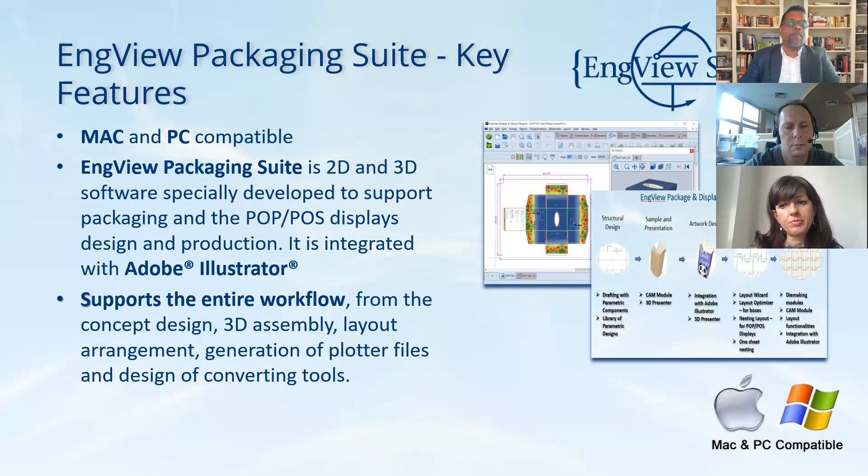From the structural design, as I said, we have the two libraries, we have the 3D visualization of the packaging, we can export the 3D, we have a very powerful integration with Adobe Illustrator that graphic designers can use to apply the graphics over the 2D and see instantly the visualization on the 3D.

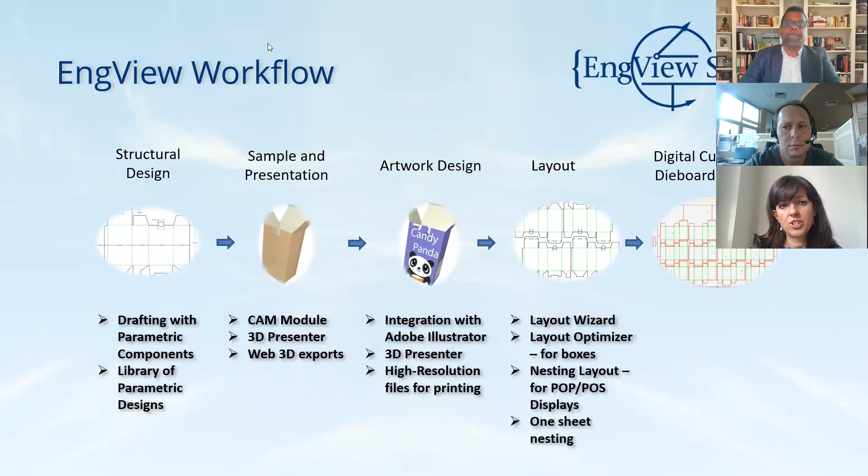We have all the capabilities for designing the files for production and preparing the files for production. We can prepare the die board design, we can generate an optimized path for the cutting, and again with the integration with Adobe Illustrator, we can prepare the printing files with high resolution images.

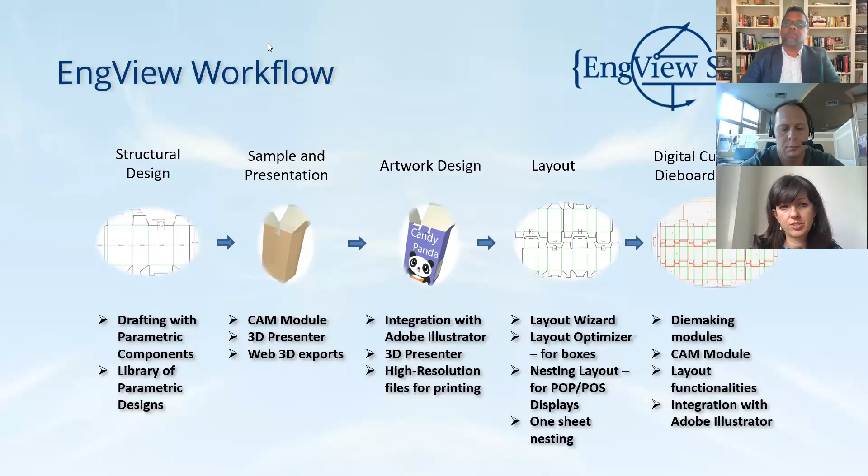Our software is structured in bundles and modules. The idea is that all companies have different production capabilities, and our software is modular based, so customers don't pay for the whole package, but they pay just for the modules that they're going to use. After the presentation, if you have some questions, you can direct them to Udaya.

You can ask them for your specific business needs, what would be the best configuration of our software. We have predefined bundles that are available for graphic designers, like our art bundle. We have predefined bundles for package designers, for display designers, for die makers, but we can also make very custom configurations just for your business needs.

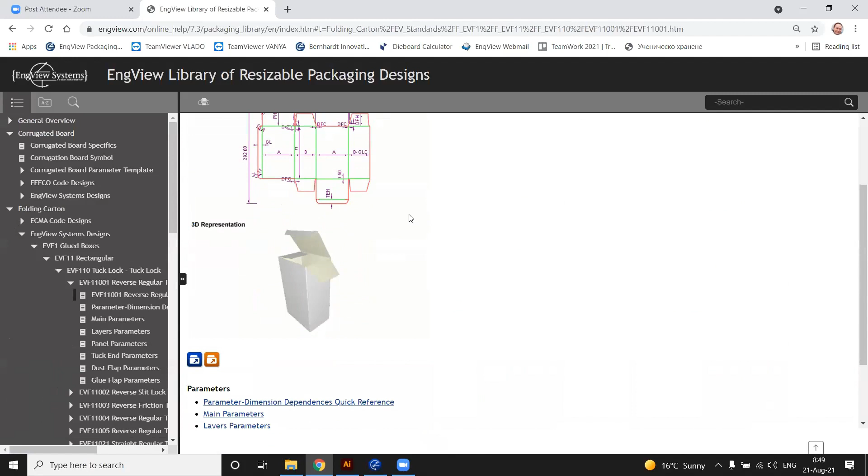Okay, Nick. As I mentioned, we have our own libraries. These are the designs which we made over the years thanks to our engineers and structural designers. We have divided them into different groups, and let's open one of the design pages. It's simplified for better navigation. There is a 2D, there is a 3D representation of the box, and there are two buttons which represent the direct way to Engview and to Adobe Illustrator.

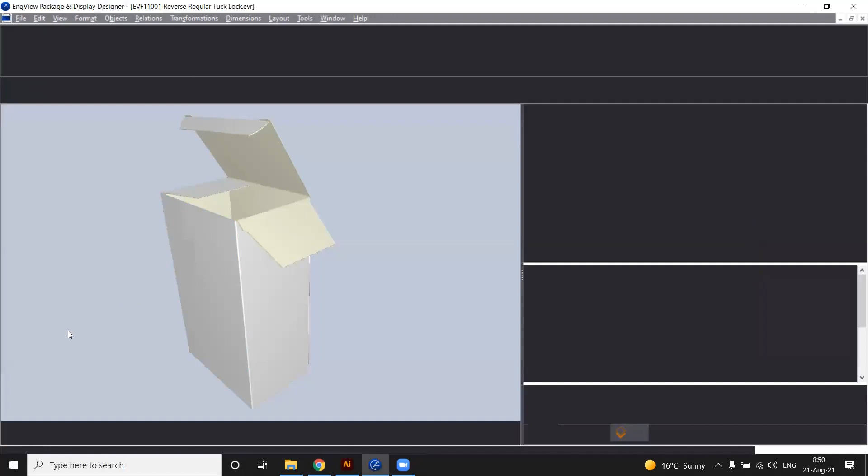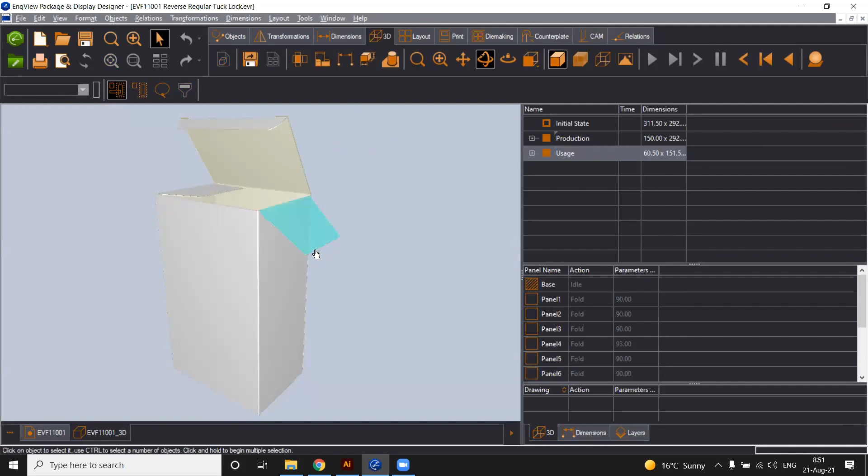It means, also at the beginning we have shown the integration starting from our library. So let's go to Engview. At the very beginning, I want to say something very important. In comparing to other software, our Engview has very unique functionalities. In one and the same file, we have the 3D, the 2D, and all of the elements and components and the drawings you will create. Furthermore, they will go in the same file. So there is no process of open, save, open, save. Everything will be in one and the same file. As you can see later, it will be for the layout, for the die board, for the CAM tool path. Everything will be in one and the same file.

Udaya, do you need time?

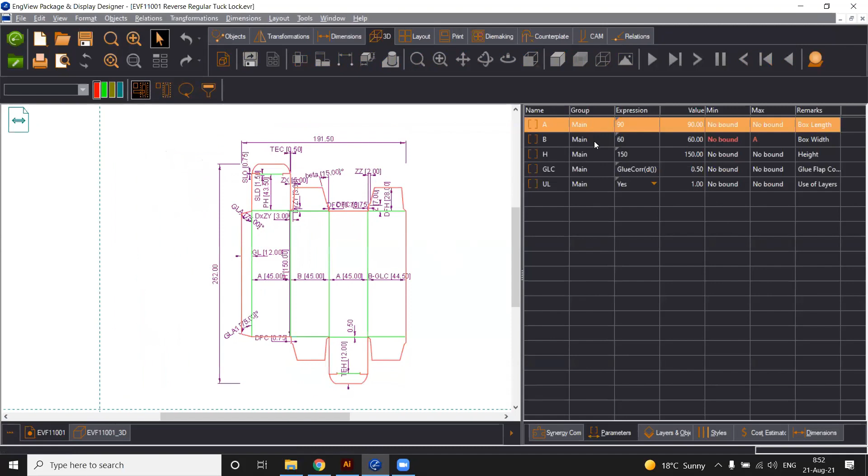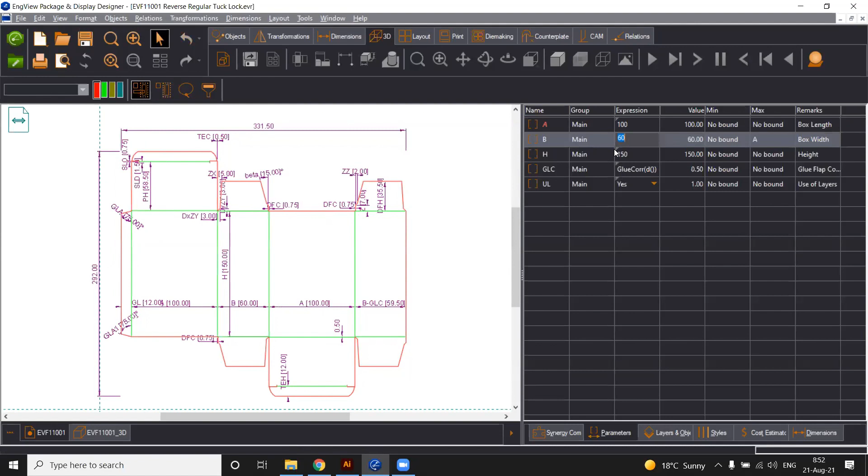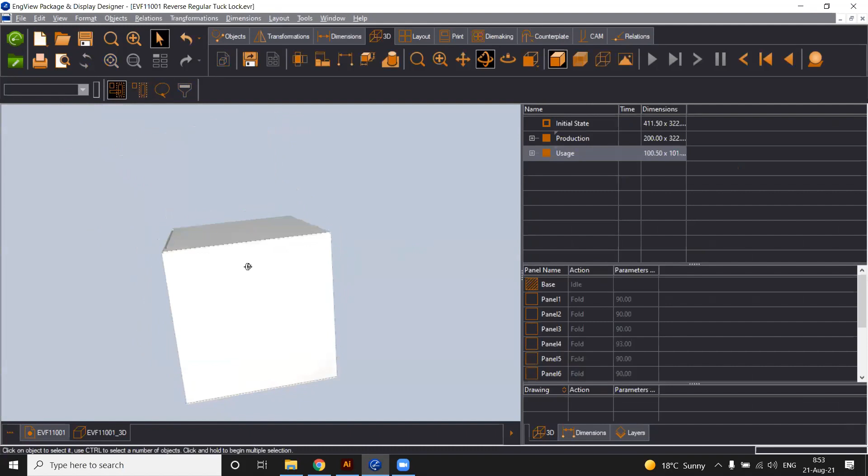Okay, as Lina mentioned already, but I have to note this. All of our more than 2,000 designs in the library are parametric. What does parametric mean? The structure is alive. It means regarding every job, we can resize, we can modify not only the sizes as width and length, but we can also make changes on the bottom, on the top, and other panels. So let's say we have a job to make a cubic box for our customer. It's very simple to put the sizes here, and the software automatically calculates the new parameters. So we have a ready box for further steps of production. Let's go to the 3D, refresh, and now we have the 3D animation for this box.

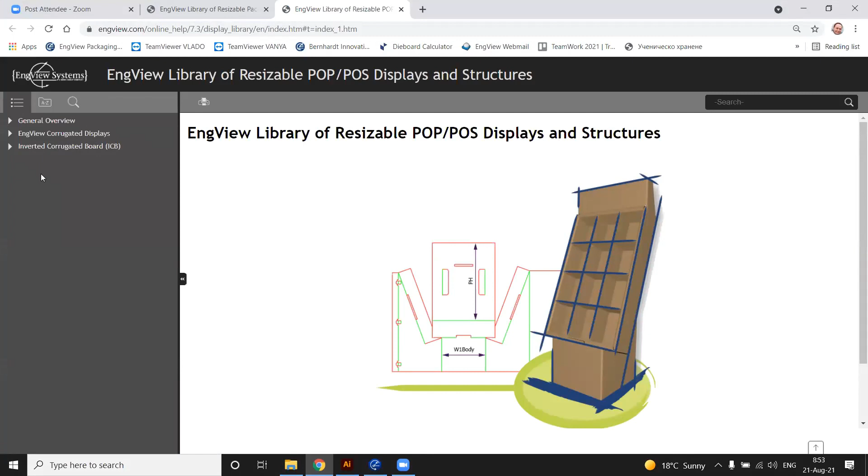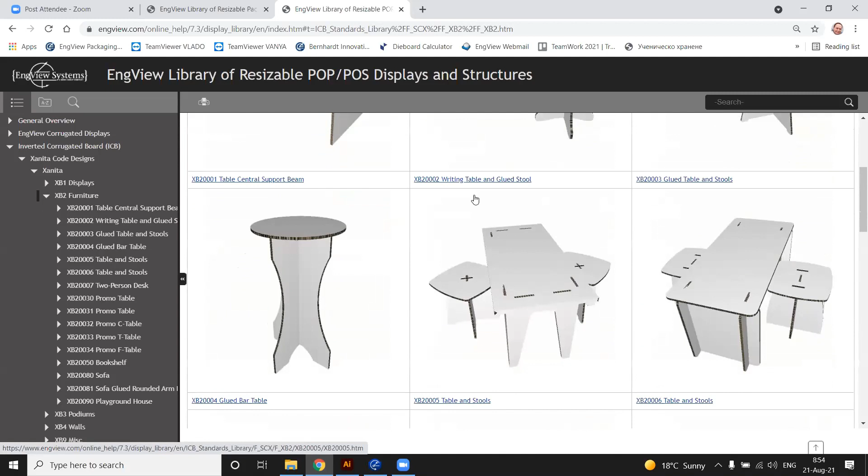Some words about the other library which we have. This is the display library. We have more than 5,000 different kinds of structures here. They are divided into groups: corrugated displays and a group of structures made with inverted corrugated board, maybe you know it as honeycomb or reboard. Actually, this is one of my favorites. We call it the library of Xanita. Xanita is the name of the material of one of our partners. So you can find very interesting ideas here for short time events, like exhibitions or promotions. You can choose any of these structures, resize it, and be ready for production.

Now we are going back to the displays, divided into two main groups: counter and floor displays. The same navigation lets us choose by the structure of the display: shelf, step, etc. So we're going to choose one of these structures and make some changes there.

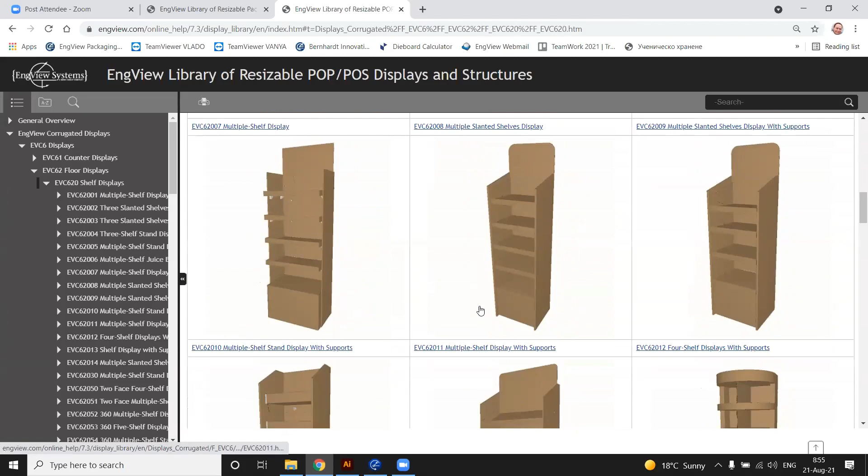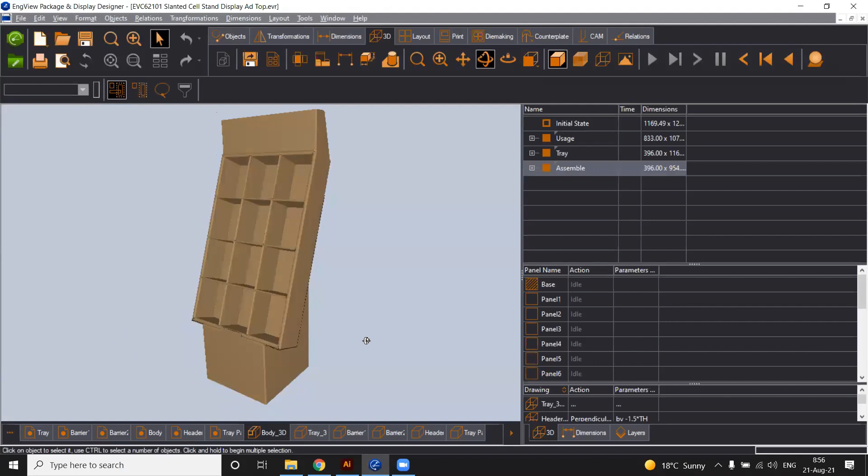As you already know how the design page looks, there is a 2D representation of the parts and a 3D representation, and very fast we're going to make some changes. As you know, modern displays are made with different kinds of materials. We can make it also the same, because of production needs and the machines, but we can apply different kinds of materials, not only for the 3D preview, but also for real production needs.

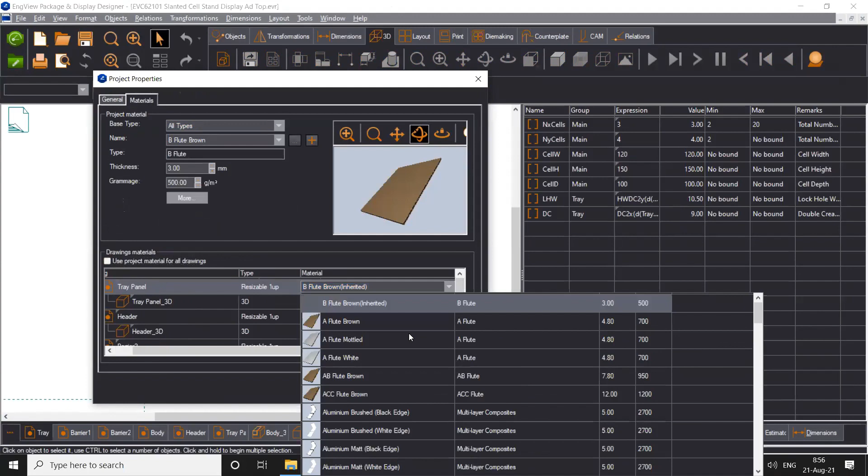So we choose, in order to make a preview, one of the other materials, which is white. So we already have this change here.

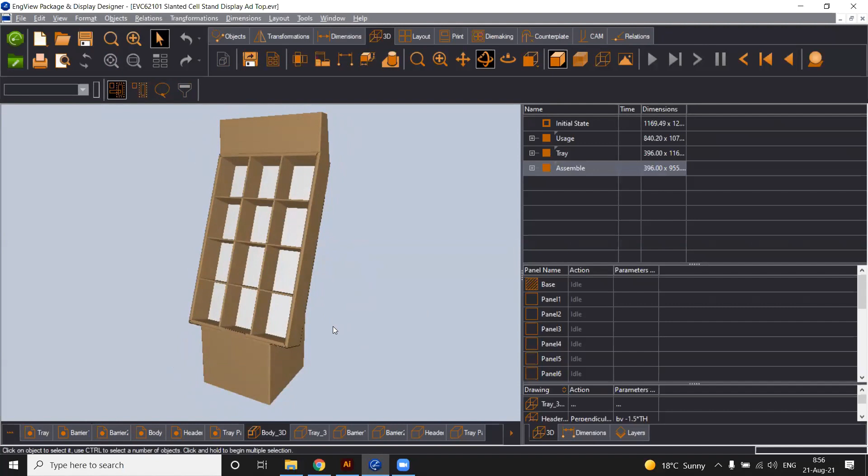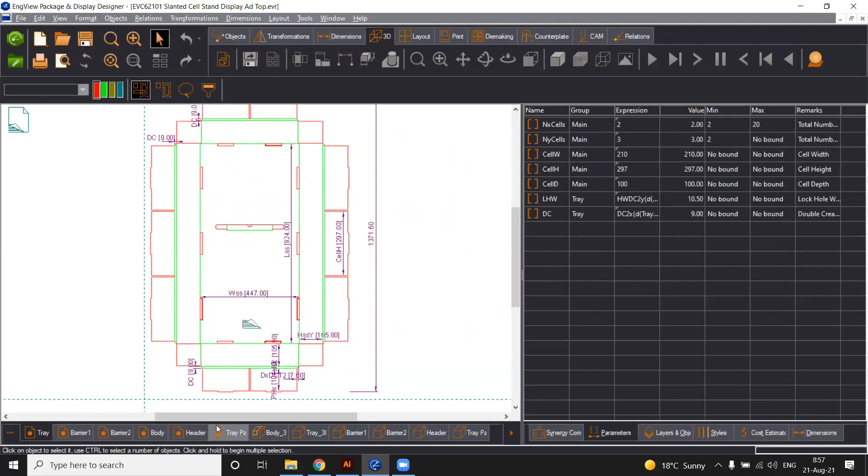But let's say we have to create a brand new display very fast. Let's say the job is to make 2x3 cells, and we have to prepare this for A4 format. So with only a few steps, making the change, everything is changed directly. We go to the main structure and refresh it. So we have a brand new display in only a matter of seconds, and we are ready for further steps of production.

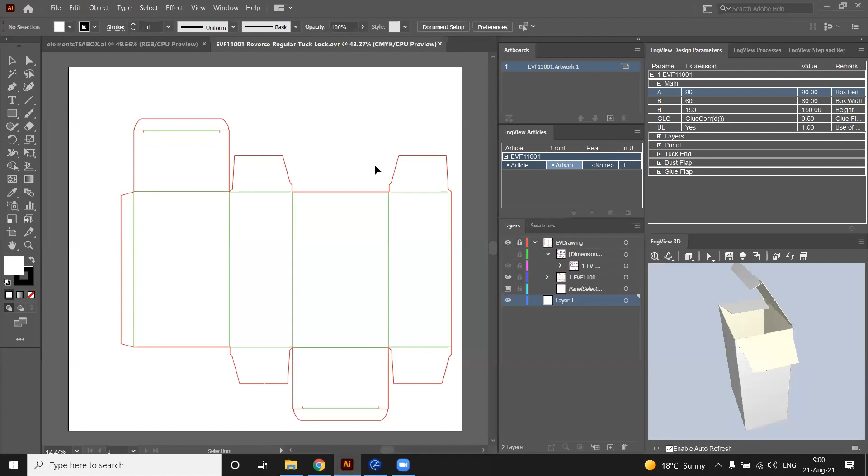As you can see here, we have also the possibility to change the sizes, to resize the box. But as I said, if you need to make structural changes, better start from Engview. If you need to make graphics and finishing effects, you can start with Adobe Illustrator, but don't be afraid, you can always switch very simply to Engview.

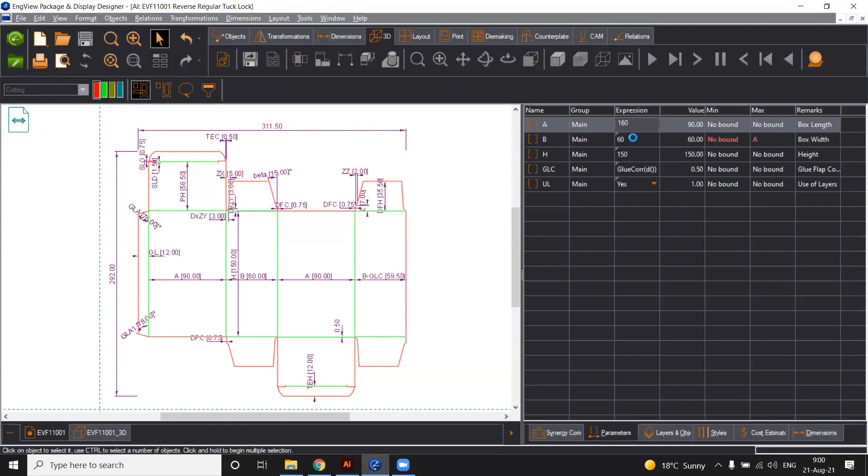So it's the same box, and we're going to make some very fast changes. I have prepared a special tea box for you, and the sizes are this one. As you can see, immediately it's changed. Here we can refresh, and here we are. We have a brand new box as a structure, and we can continue making the Adobe design.

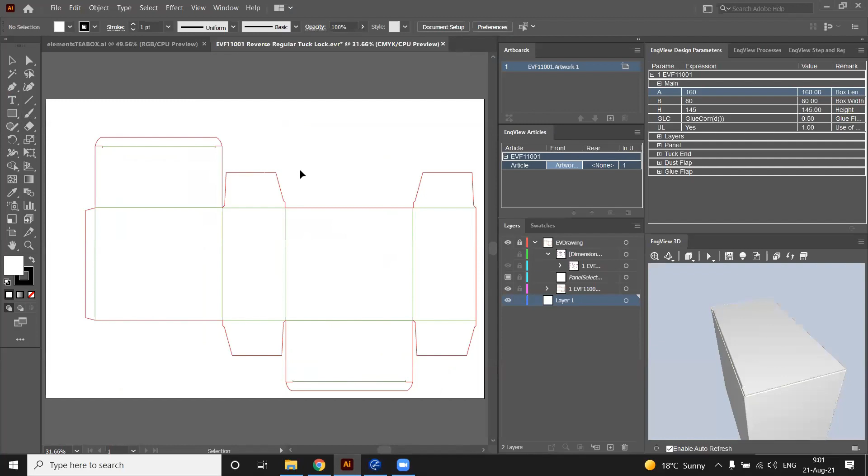One of the first steps made by designers is to make the graphics for the background. I have prepared a tea box. First of all, I want to apologize, I'm not an Adobe Illustrator professional, but I'll try to do my best. So now we have the graphics, and as you see, immediately we can see the graphics in the 3D.

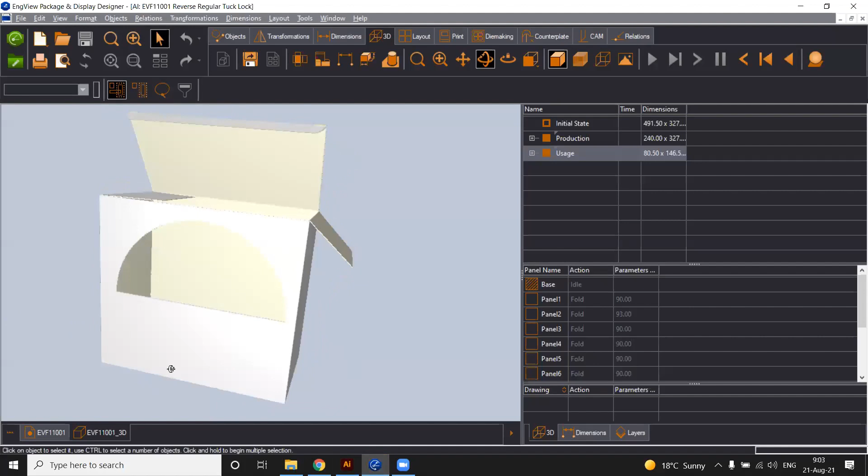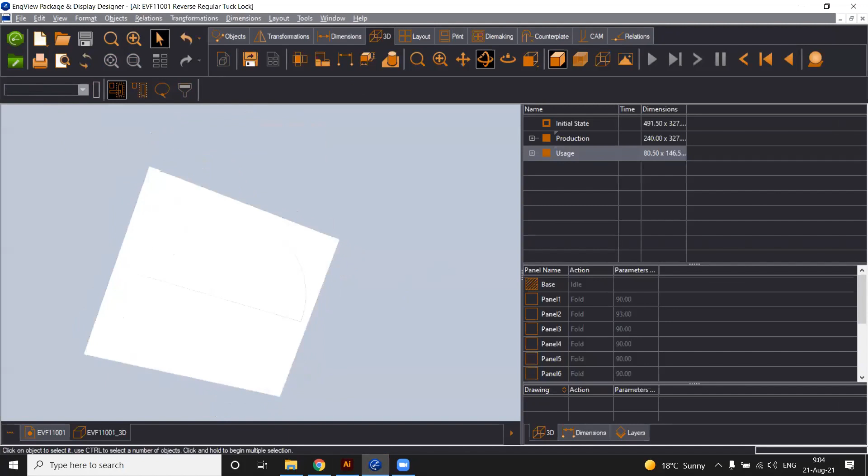As you can see here, we have already the cutting, but I wanted something more. I wanted to make this an opening panel. I choose the bottom line and I make it crease. As you can see, immediately there is a change in the color of the line, which represents the creasing. I go to the 3D, I refresh, and here we are. We have already a panel which could be open.

I have it fold in order to make it for the preview. I choose the panel, I go here, I fold it by, let's say, 45 degrees, and here we are. We have an opening.

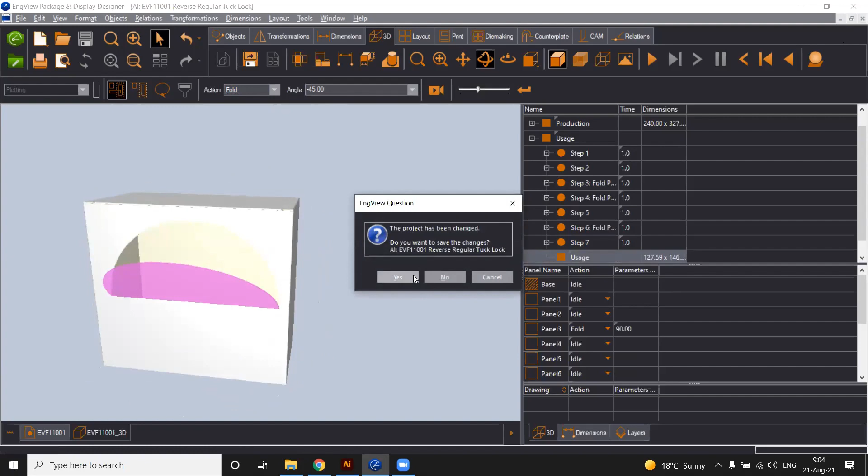Okay, let's continue. The next step is usually to make some finishing effects, to add a name, to add images which will be applied as finishing effects: foil, embossed, etc. So, as you know, for this kind of finishing effect, we should put a layer.

Finishing effect, we should put a layer. Let's call it this layer foil. Udaya, do you need time for explain it?

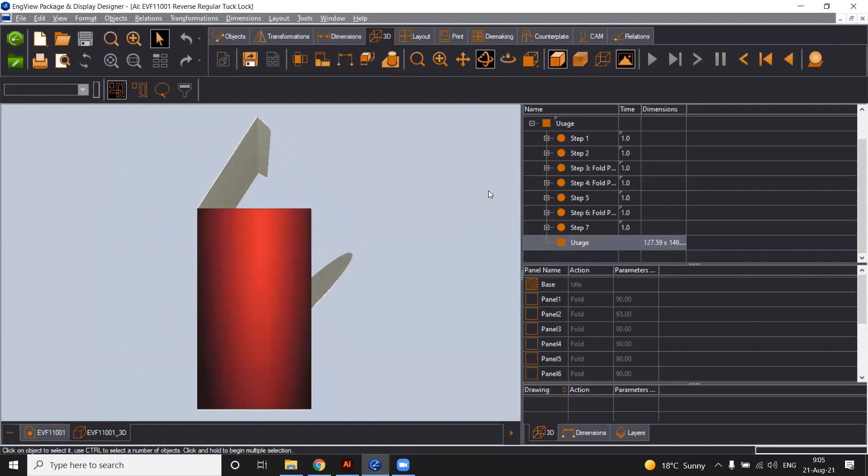Okay, so we have prepared a special layer for foil. I'm going to my file, choosing the name, copy, and then we put it in our design. As I said, I'm not a specialist in this. I put it here. As you can see, immediately there is an image already applied in 3D, but I wanted to make it with hot stamping.

So I'm creating the finishing effect, and I'm gonna choose the foil layer. I choose the partial hot stamping, and immediately there is hot stamping gold for this text. Okay, I wanted some more. I wanted for the same layer another image. I choose this one.

I'm going back to the design, and I want to put it there. As you can see, immediately the finishing effect is applied. It's not okay, but that's because my video card isn't working properly today.

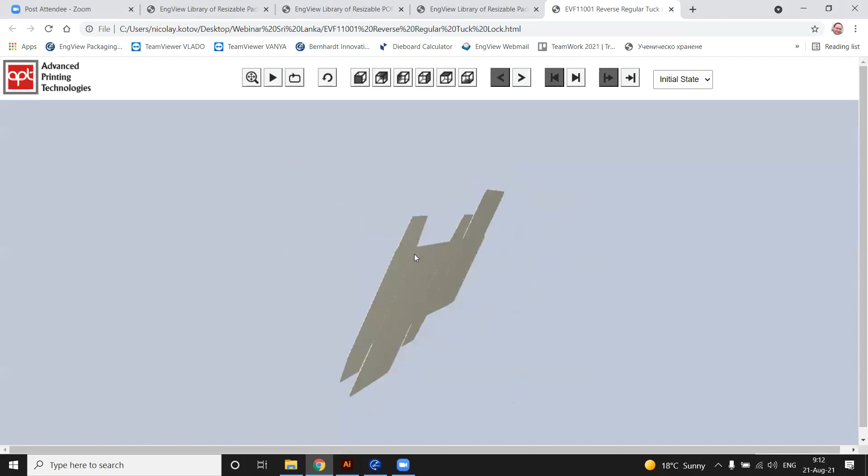Let's say at this point we have already a design here, and we wanted to show it to the customer. We have developed a very easy export of the 3D animation, which could be played by the customer. He could see not only the finishing effects on the top, but he could also see the whole structure of the box. Of course, here is the animation, and you could impress your customers very easily. You could make it for every box on every stage you make in order to confirm you are on the right way.

So it's very easy to have this HTML file, to export it via email or put it somewhere on your server. It's very easy because you don't have to save bigger files to send via transfer or any kind of communication, because it could be opened in any kind of browser, also on mobile phones.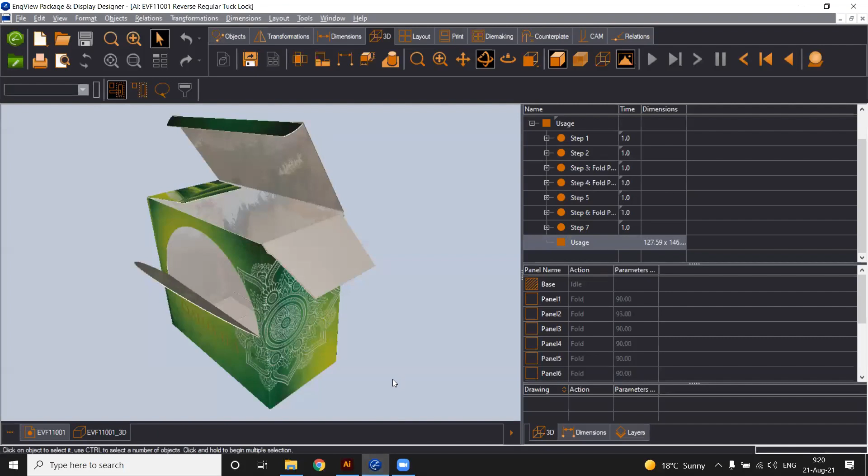It will be very challenging because let's say the customer says I need from one design 1,000 boxes, and from the other one I need 1,500. But it's not a problem for the Engview software.

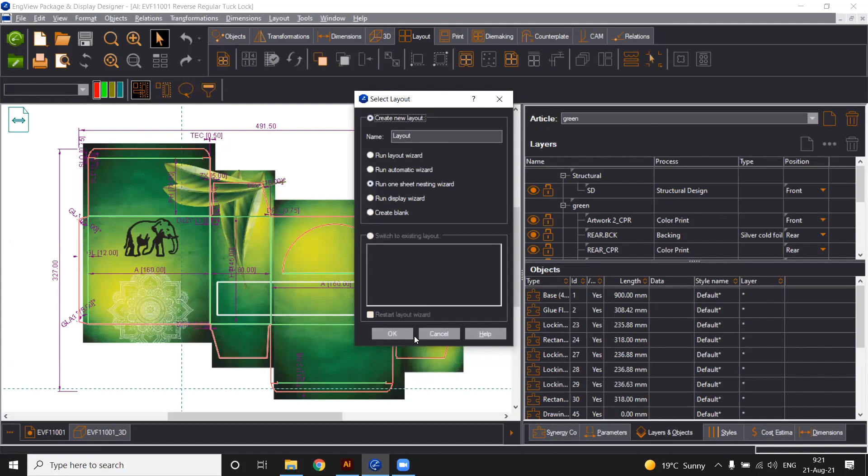We create the layout here. We start with the one sheet nesting wizard, but of course we have a standard manual and also an automatic wizard. Because we have two designs in different quantities, we run the one sheet nesting wizard.

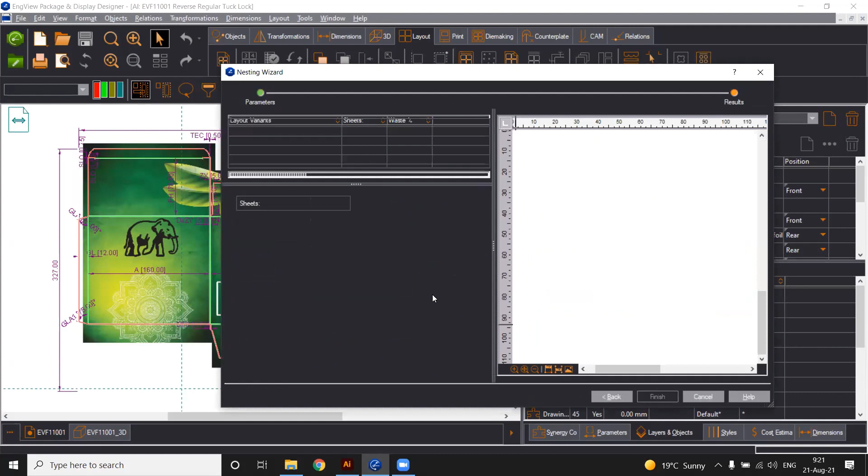So we start from here. We put the quantities which are made by our customer for every design we have, and at this point we are sure that Engview calculates for us, without any mistakes, the best optimization layout for this job.

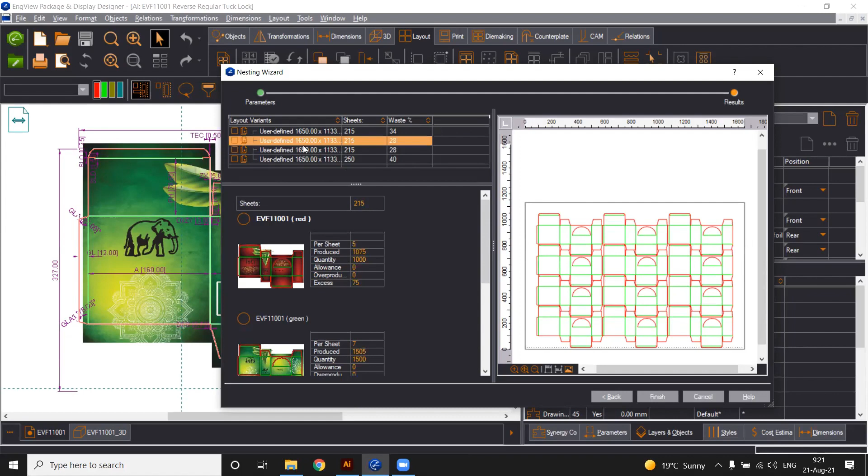So here we have different scenarios, different variations, based on the waste which is planned for this job. Of course, we choose the scenario and the layout with less waste, and we finish.

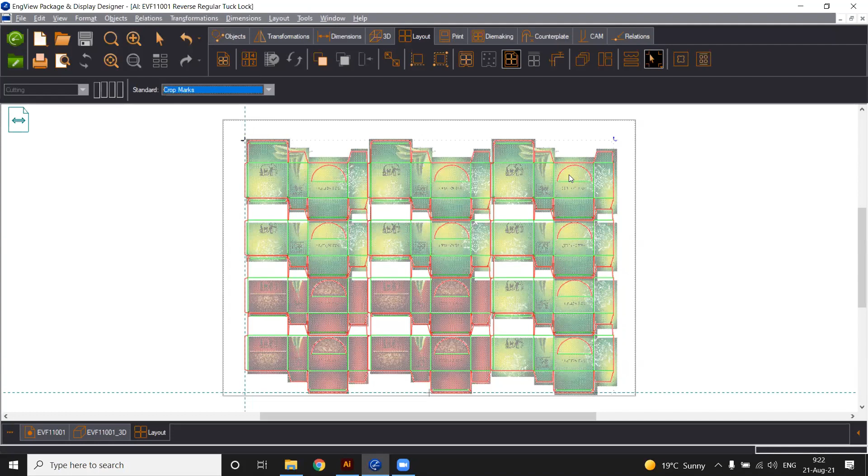We have already the layout. Of course, we have to put the crop marks or different kinds of marks which will help for the further printing processes or production processes. Let's say it will be crop mark here, here, here, and here.

So we are ready to go back, save the changes, and we are in Adobe Illustrator. In a moment, I will show you how to create the layout here, but Udaya?

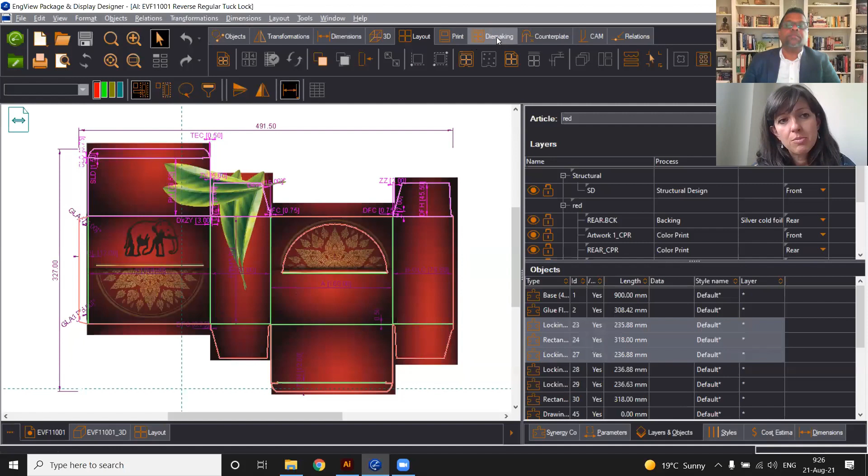Hi again. So thank you, Nikki, for this demonstration. I just want to say a few things. First of all, Nikki showed you the process until printing, the path for production, for the printing side. But we have other modules in our software that can help with die board design, that can help generate an optimized path for the cutting or for sample making. So we have many more modules in our software to continue this process for production.

Okay, let's go through the questions now. I will allow anyone that wants to unmute their microphones to ask their questions. I see some here in the chat window, but they're mostly not in English, so I'll ask Udaya to read them and translate those questions.

I think Srimal Veerasinghe is asking whether, since he has shared an artwork, that can be embedded into the software and then he can do the design. So I said yes.

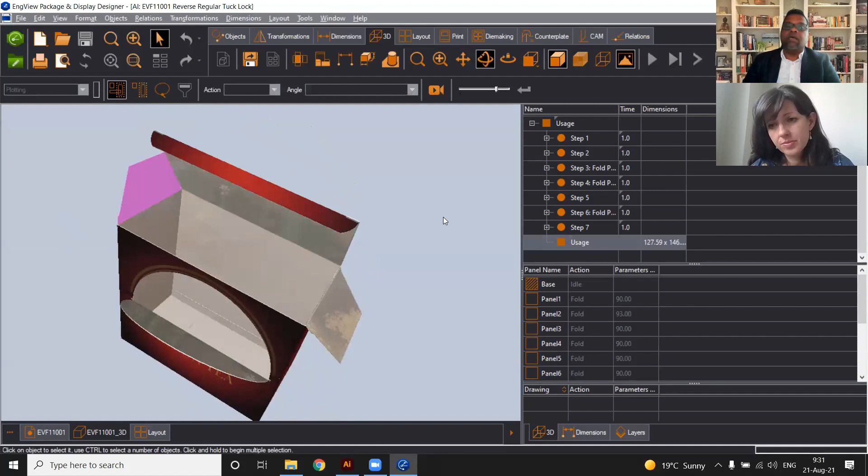There's another question. Nikki, can you show how do you open it, how it is connected as a plugin in Illustrator? You mean, okay.

Can you see this? This is the Engview window, and then we open it. Here is the workspace of Engview, but of course you can place it on top or on the bottom, it depends. For me, it's usually here. Also, in our training guides, you can see the optimal position of the Engview workspace.